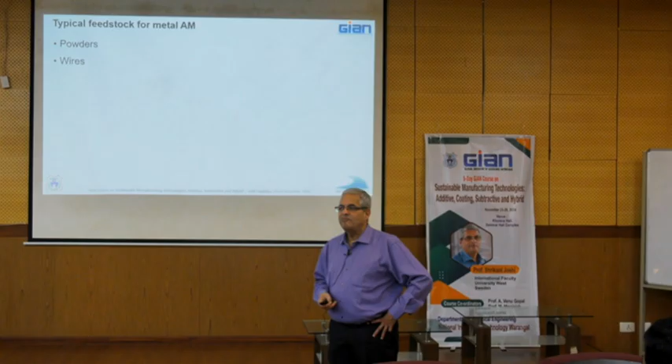Let's start, we already spoke about that. We'll talk a little bit about powders, a little bit about wire, more about powder than wire, because historically people have been using the same wires that they use for welding and cladding. There's nothing different there, although it could change, because AM is such a new field, right now people use what is available, even with standards.

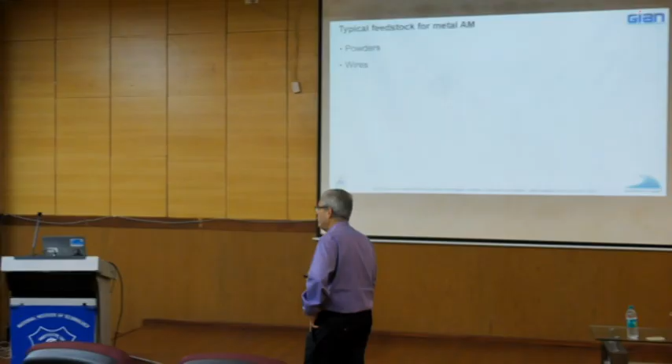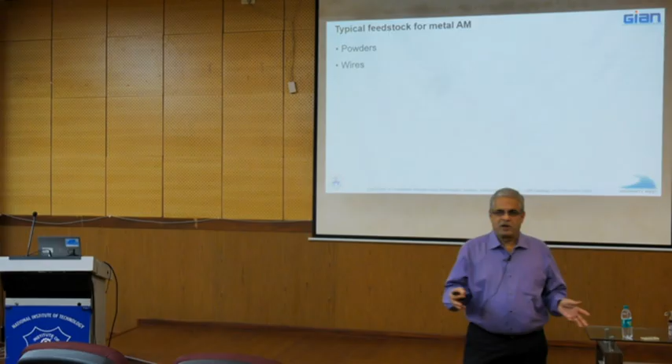And that's why I find the post-treatment part very interesting, because there have been standards available for materials that are traditionally manufactured for, let's say, heat treatment, and people use the same standards even now. They are specified as standards for AM, but we have shown, one of my earlier PhD students, that you need not use the same heat treatment, for example. What you can do for AM can be very different from what is traditionally done in case of cast or forged material, right? So that's important to know.

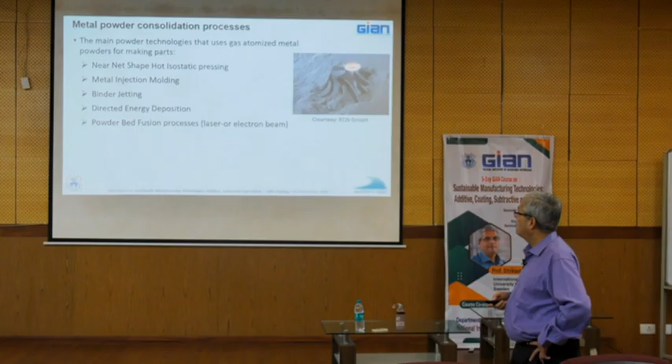Let's talk about powders in general and what are the main metal powder consolidation processes. I don't know how many of you have heard of near net shape by hot isostatic pressing. In one sense it's a very old technology, but very prevalent in the industry. Many of the powder metallurgy parts are made by hipping even now, or sometimes they use also cold isostatic pressing and that kind of stuff, or sintering.

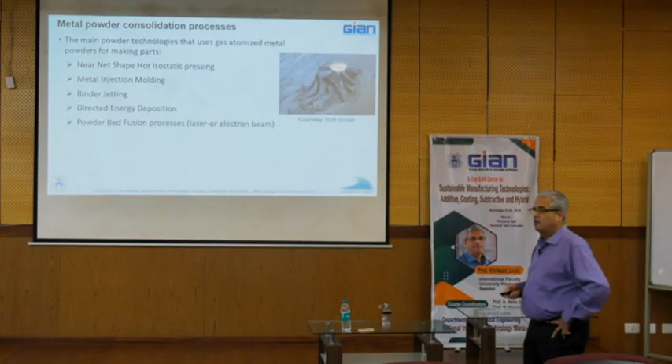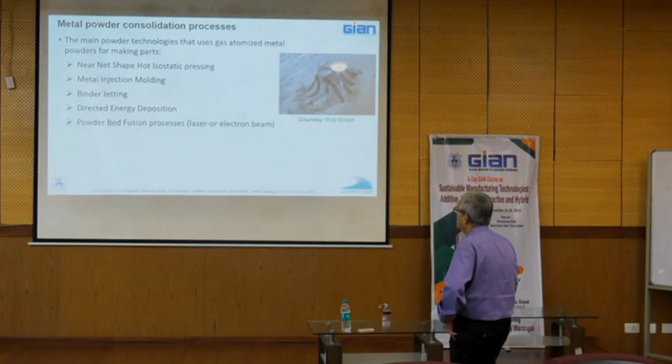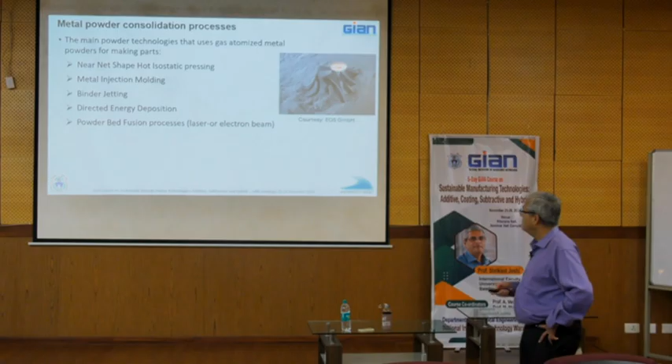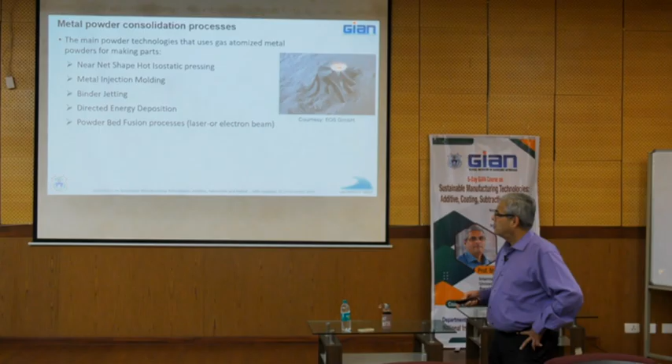But when it comes to near net shape, this is one of the main consolidation processes in vogue, but we will not talk about that because I don't believe that really qualifies as additive manufacturing, so we take that out. Similarly, metal injection molding is also very popular when it comes to consolidating powders, so this is just for information, it just does not fit in the rest of the things we talk about. Binder jetting, DED, PBF - we spoke about all of these, and today we will talk about powders in the context of at least these two, the directed energy deposition and powder bed fusion.

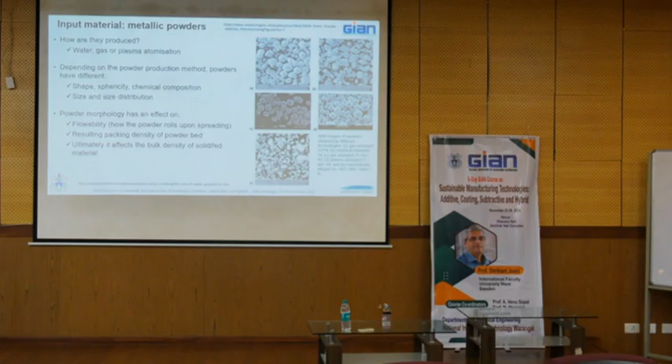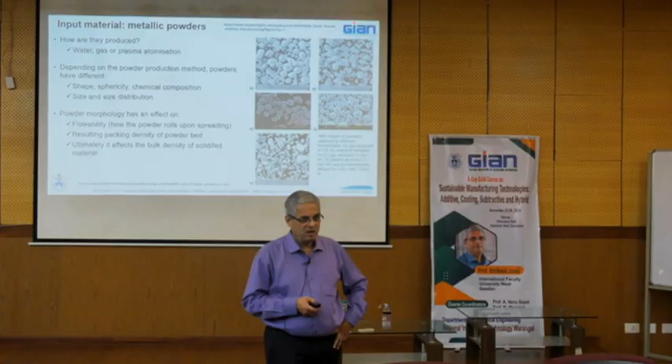So there are some things in our mind which are historical sometimes, but today we get really good powder feeders, right? We are able to feed powders as fine as 3 to 5 microns even, which earlier was not possible even with spherical powders. So today powder feeders are very good, but by and large what you are saying is right. Spherical powders are better, but you must also know it is not absolutely necessary. There is flowability in angular powders as well, which is not so bad.

But with powder bed, as we were briefly talking yesterday, at the moment everyone believes spherical powder is necessary. So we will assume that it is necessary, for the time being.

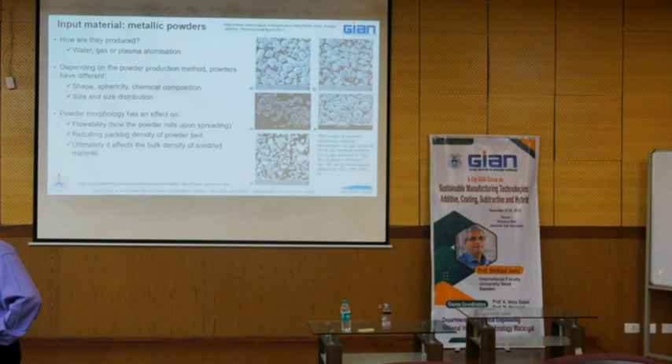Size and size distribution, is that important? Why is that important? Why is size distribution important? Not much important. Who doesn't agree with what this gentleman is saying - that size and size distribution is not important? You disagree? Why?

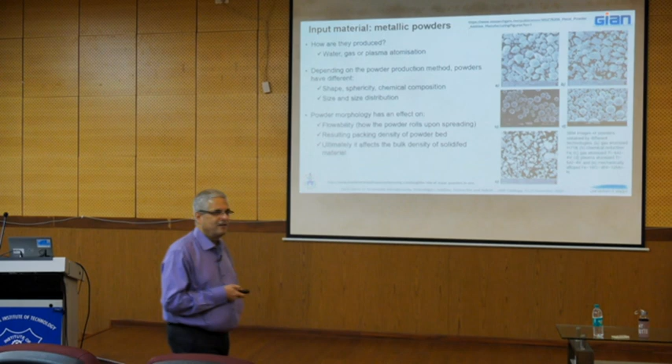I will say one more time - you are all engineers, please use the right terminology. If size is different, you get impurities. If you say impurities, I don't like that. So, you may not get complete melting sometime. That's what you mean, right? So that's okay, but you can't say impurities. Yeah, yeah.

Lack of fusion. Yeah, correct. Absolutely correct, that's the right answer, right? Having said that, particle size distribution is inevitable - it will be there, and I think that is what you were trying to tell. You cannot get mono sized powders.

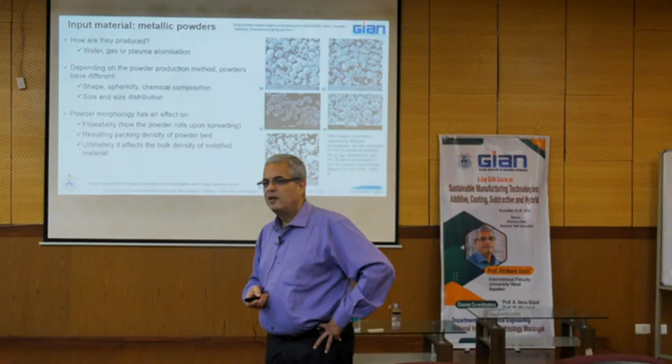Of course you can, but you have to give an arm and a leg to get that - it will be very expensive. If you say I want powders between 10 and 11 microns or something, it will be very expensive. So typically powders have a range. We spoke yesterday about 50 to 100 microns, 10 to 45 microns. So they have a range, and that is okay. You have to live with that for any process to be practically feasible.

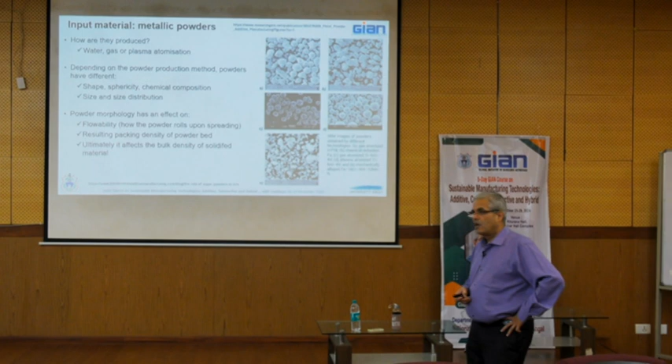And what you said also is correct - there is a lot of work done on how size distribution improves packing density. But that's a different story, we need not get into that right now. But I'm happy you said that - for a BTech second year student, that's impressive.

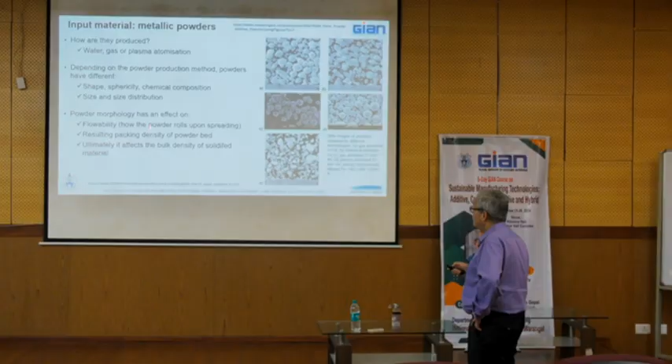Yeah, that's pretty good. Powder morphology - we are for the moment assuming that you need spherical for packing density, same point, right? And both of these eventually affect the bulk density of what you build.

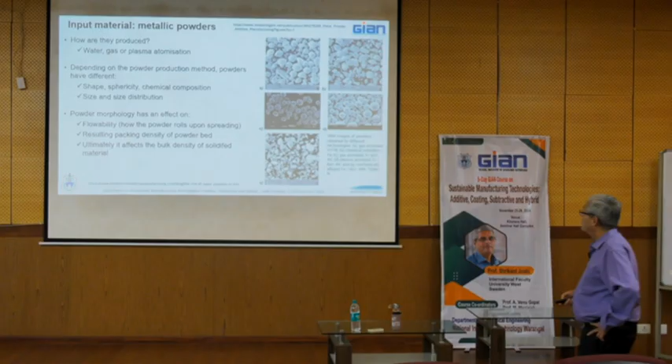You see all kinds of morphologies depending upon what manufacturing route you have adopted to make the powder. Once again, I'll go back to thermal spray - we use a lot of these kinds of powders as well, and it still works quite well.

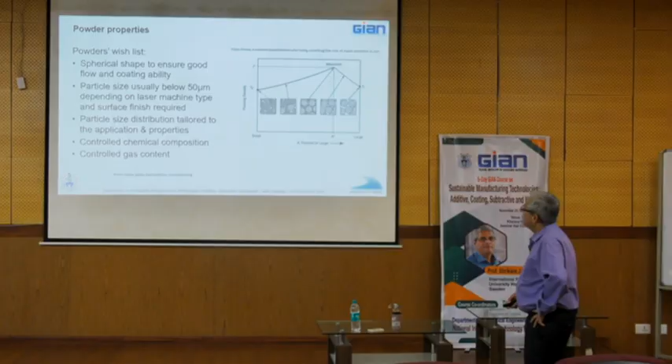But most of the AM crowd today uses these kinds of powders, because they're afraid - we are afraid that any other powder will not work. So if you want to write a wish list for the kind of powders you want to buy today, here are some of the points that I was looking at on one of these websites.

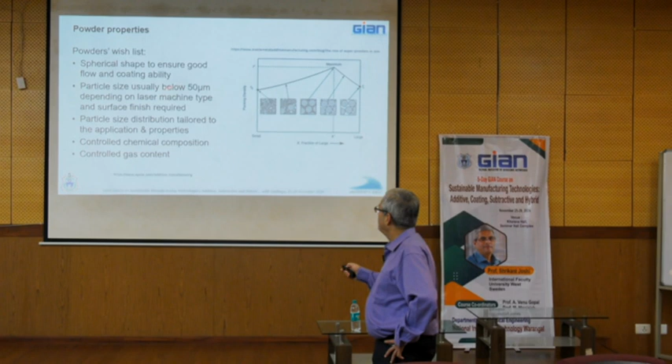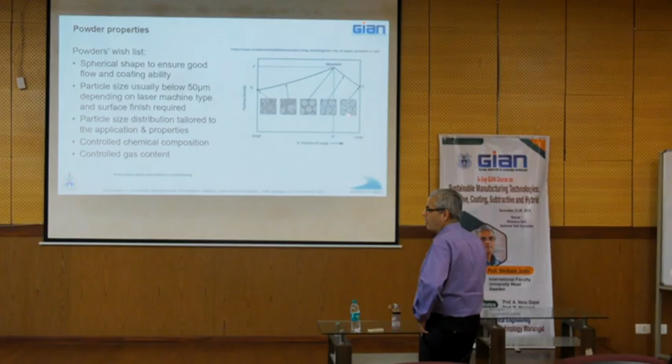You want spherical shape to ensure good flow. You want particle size - it depends upon what method you are using, but let's say below 50 microns. Particle size distribution should be tailored - if you're talking about packing density, that's not bad. If you have all of this size, you of course will not get such packing, but people say it should be tailored for the application. Nobody does that kind of tailoring, because it's just impractical.

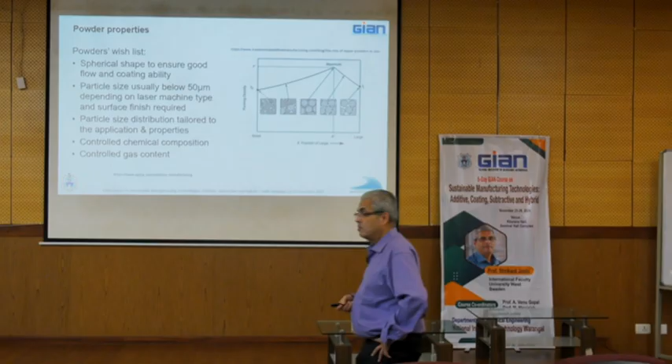Imagine I'm a powder supplier - I cannot begin to make different distributions in the powder for someone doing DED, someone doing powder bed fusion, someone who wants it for coating, someone who wants it for a powder metallurgy part. So the best thing they do is sieve and differentiate cut sizes, but beyond that, they don't do so much.

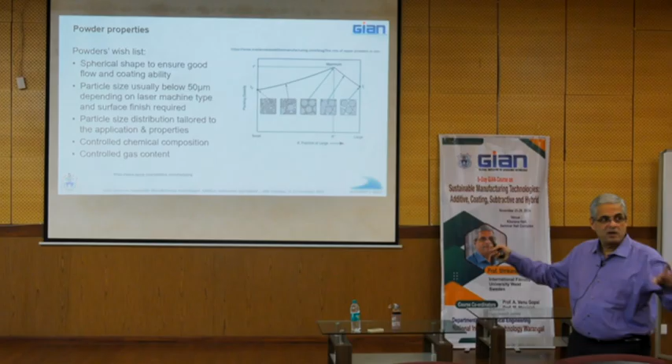If you open any powder manufacturer's catalog, you'll get many size distributions, many different cuts, like 5 to 15, 15 to 45, 45 to 90, more than 90, whatever. So depending upon what suits you best, there is a big choice to be made.

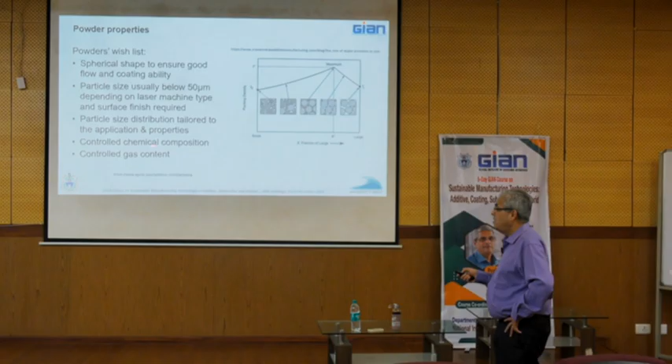Controlled chemical composition is where you must take care of impurities, whether or not they're there. Controlled chemical composition.

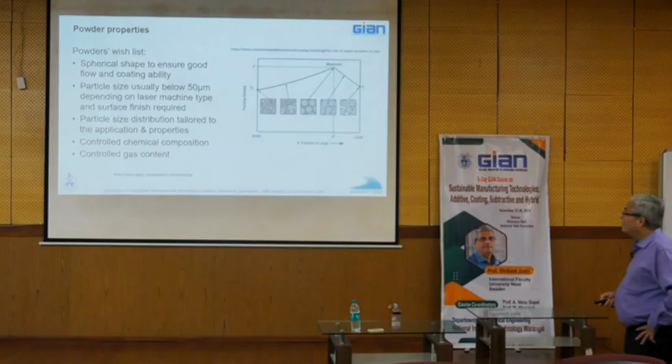There's one aspect we won't get into here, but in some cases people expect elemental loss during processing, and therefore they want to correct that in the feedstock. There are many examples of this. If you expect elemental loss during processing, you put a little bit more of that element in the feedstock, assuming some of it will get lost. So there are ways to tailor composition in that sense.

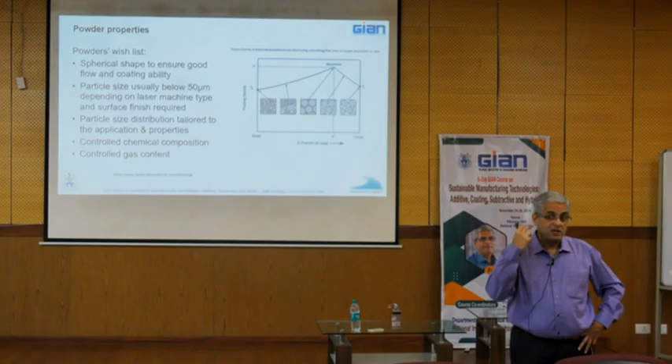Some of these powders, depending upon how they are made, also have some entrapped gas in them. What happens if there is entrapped gas in the powder? That leads eventually to porosity in your build. So all of these are important things to consider.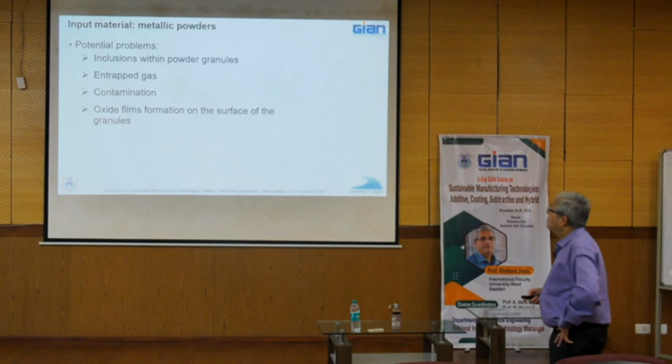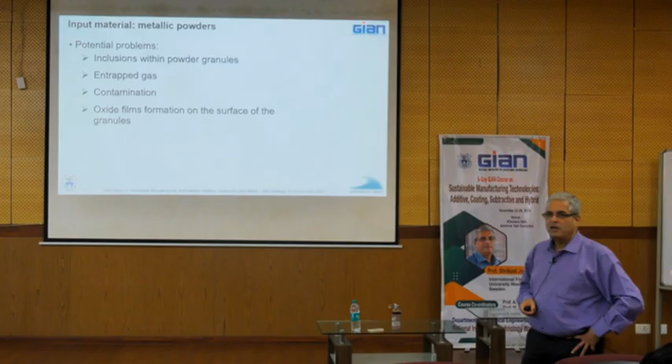Potential problems include inclusions within the powder granules, sometimes entrapped gas as we discussed. All of these you should know. You should always insist on a couple of things from the powder supplier: insist on a chemical analysis always, and insist on a size analysis as well. Those two things you must always insist on from whoever the source of your powder is.

We saw this yesterday, the range of materials that you can use in AM. This is an endless list, it can go on and on.

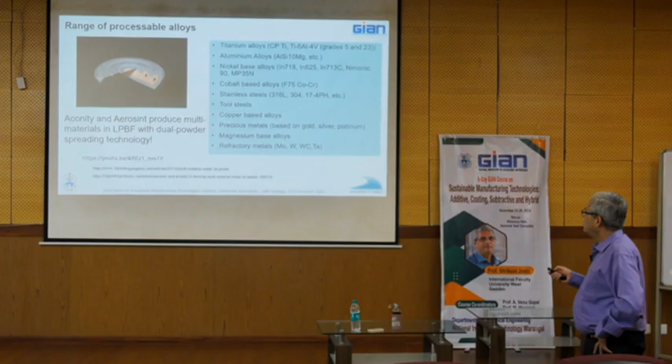While I was walking, I was talking to Dr. Manjay about what one of his PhD students does with DED, and that is multi-material. Once you talk about multi-material, the field is just wide open. You can do almost anything.

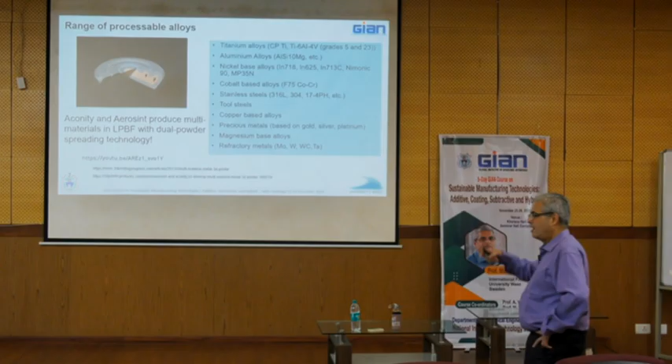I have a PhD student myself working on multi-material DED, and we are trying to do Inconel substrate graded to yttria stabilized zirconia. So we are doing a metal-ceramic functionally graded material. So you can do anything.

We have another project that we're discussing with GKN Aerospace, where they want us to build copper along with stainless steel, or copper ideally with a nickel based superalloy, and we are absolutely struggling. Why are we struggling? Take this example, copper with nickel based superalloy. Why are we struggling, do you think?

Thermal conductivity, I don't think we're struggling so much with that. Yeah, mostly that. We are struggling because the laser that we've been using for depositing nickel based superalloys suddenly is inadequate when it comes to copper. So we're not okay with that laser for copper. So we are shopping for a green or a blue laser at this point.

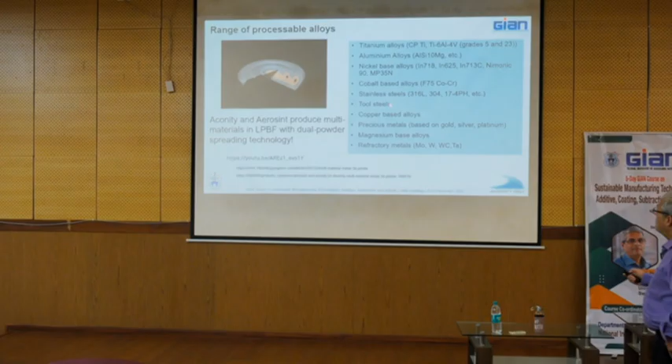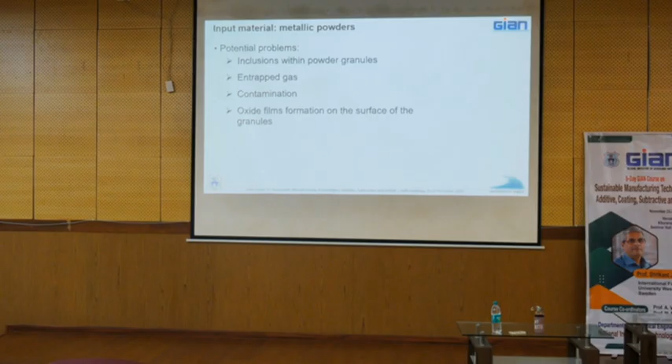Anyway, that was an aside, but important for you to know - there are so many things you can do. For each of these you will need powder, and you need to find suitable sources for that. I suspect how important all these issues are will sometimes depend upon which material you are talking about.

For example, titanium will have a completely different set of challenges compared to, let's say, something like stainless steel. This will be much more forgiving. It doesn't matter if something happens slightly with composition, but with titanium, nickel based superalloys, your threshold is pretty stiff.

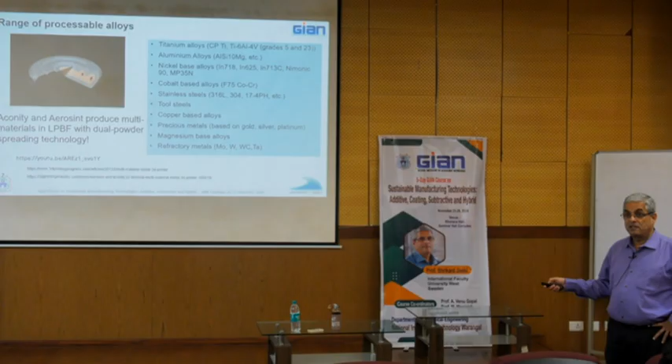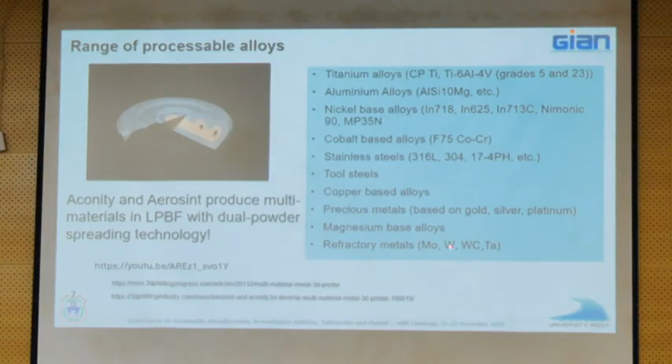Some materials like this are also extremely difficult to deal with, but here you may want to revisit the size - you cannot always use the same particle size. These are very high melting, extremely high melting materials, so you can't use the same particle size in a given process as you would use for maybe copper or stainless steel. You should be aware of that.

Powder manufacturing methods. Do you get spherical powders by ball mill anytime in your life? No, right?

But if you want to mechanically alloy powders, then ball milling is a good idea, but not for spherical powders. Now, if we assume that spherical powders is our target, most often people use atomization techniques.

What is atomization, do you think? Simplest definition of atomization, anyone?

Disintegration - breaking down of a material to the smallest possible size, smallest possible particles.

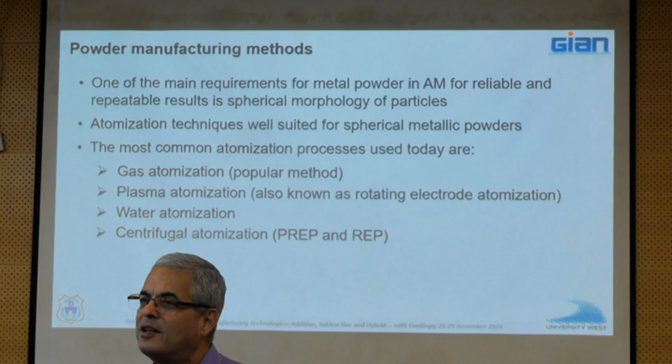So you're making life very complicated - you are relating atomization to atoms. Yeah, that's not the case. Particle into simplest form, a single particle. You're relating that to atoms - no, it's not that complicated.

So usually... is the problem with the projector or that cable? You think?

In your research or whatever you are presently doing? No, you use powders. Okay, what kind of powders do you use?

So when you get a powder, what do you characterize it for? Because that's something we are going to talk about here. What are the important characteristics of the powder?

What do you do with the powders once you receive them from a supplier? Sir, we do SEM to check the shape, size. You will do SEM, okay, for shape and size.

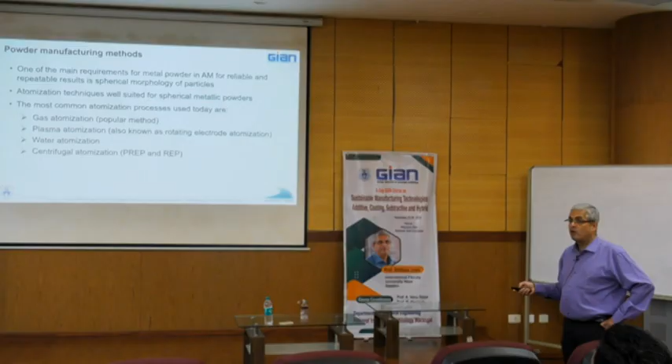Techniques are the most popular to make spherical powders. If you don't want spherical, there are other ways, but I've stayed out of that. Out of all these, gas atomization is the most popular, especially for powders used today for additive manufacturing, and it involves three major steps: one is melting, the second is atomization, and the third is, once you get a product, you want to size it - get rid of the fines, get rid of the coarse powders. So these are the three main steps.

You need to find a way to melt your feedstock, and you could do it in different ways. You could have the charge initially in the form of an ingot. If you are making complicated powders, you can put different powders together, make an ingot, then melt and atomize. And so you essentially atomize - in this case, atomization means fragmentation. You fragment a molten droplet, not take it to a level where you can't divide it anymore - that's too far.

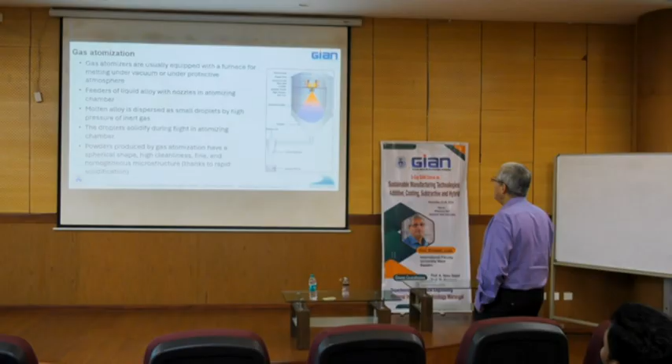Atomization is fragmentation - the molten stream is fragmented, and then you cool it very quickly, so these droplets solidify really fast and you get spherical powders. Each droplet converts into a spherical particle. That is broadly the idea in all atomization techniques. The changes may really happen in how you are melting it. In this particular case, this is equipped with a furnace, so the melting happens under vacuum, so there is no oxygen pickup, etc.

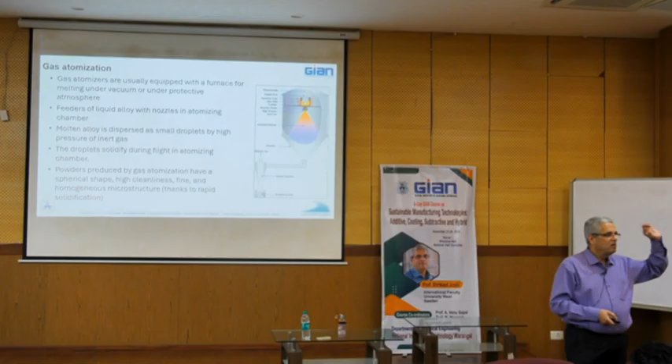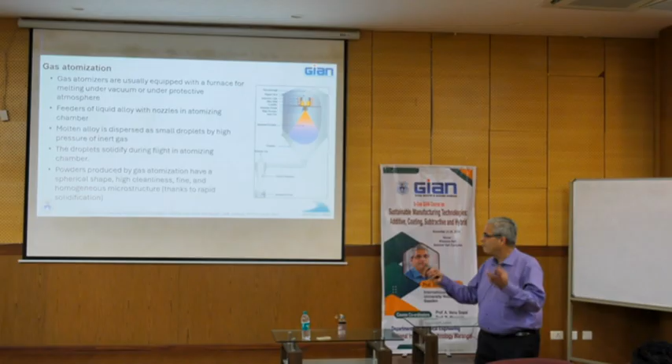These atomized droplets formed because of a high pressure gas used for atomization then solidify in flight to get your individual powder particles. As you can imagine, these would have a very varied size distribution. Then there is of course a collection chamber - these are collected and sometimes separated using a cyclone to some extent, and then finally sieved, so that you get the kind of size cut that you require.

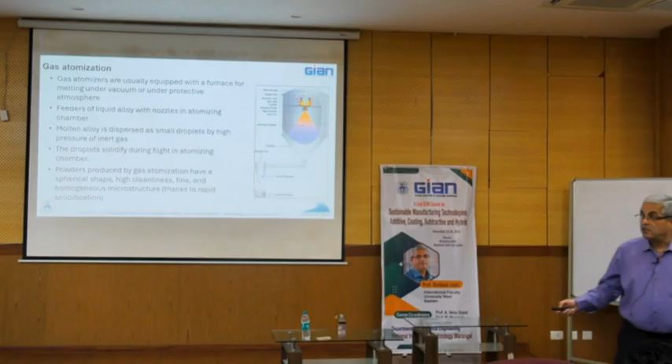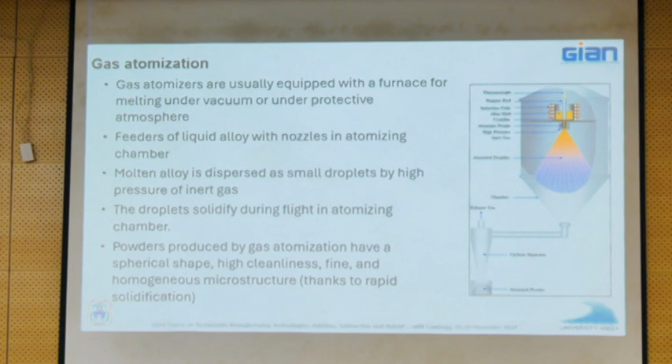The reason people prefer gas atomization is that it's a very clean process - you do it in vacuum, essentially melting a charge and resolidifying the atomized molten stream. So there is not much opportunity for any contaminants to come in, and cleanliness is a big thing.

Even homogeneity from a chemistry standpoint is assured, because you're just melting that stream and solidifying it. So there is no in situ reaction involved or any such thing. You get a very homogeneous microstructure as well because of the rapid solidification.

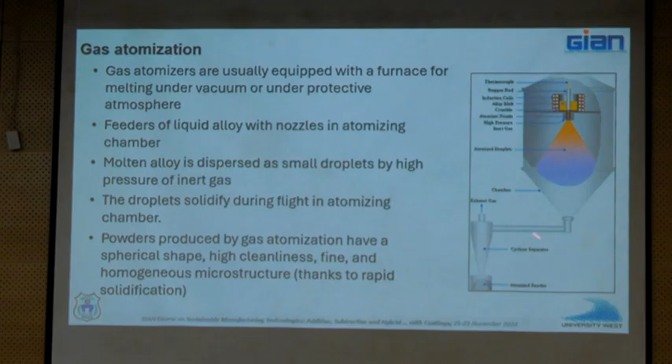There are some different variants of this gas atomization, but most of the differences essentially come there - how do you melt this? All the difference happens there. Just like with thermal spray, the fundamental of how coatings form is the same; what kind of heat source you use is different. Somewhat similar here - all the differences kind of reside there, but otherwise you do get atomized droplets which rapidly solidify, cool to form powders.

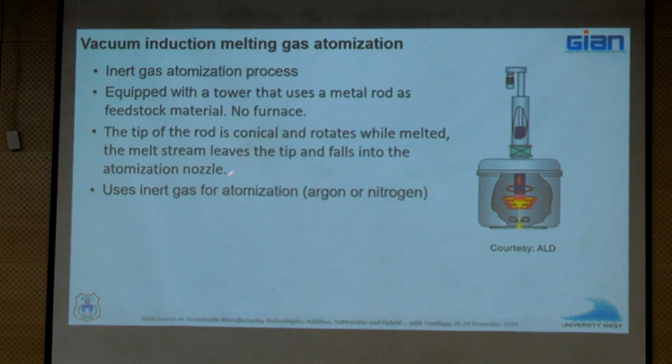Here in vacuum induction melting gas atomization, as the name suggests, this is equipped with vacuum at the top, and this vacuum during melting ensures that it is clean. There is inert gas that is used for quenching the molten stream. So you have different variants of that. I don't want to get too much into detail, but all of them essentially try to do the same: melt the feedstock - an ingot or whatever of the same chemistry as the powder that you need - and then use an inert environment to collect the powder that you desire.

You can also do water atomization instead of gas - use water jets to quench. This also works very well so long as water doesn't react. So when the materials that you are producing are non-reactive, water is frequently used; it is much cooler and gives higher cooling rates as well.

How do you take a powder specimen under an SEM? Can you please tell? A little bit louder so that they can hear you.

Take a sample of the powder from the raw material, place it as a piece of paper and observe it under the microscope. We have to find out whether it is metallic or non-metallic, and then we have to place it on the carbon tape. After that we have to do the coating.

You said you take it on a piece of paper and see it under the SEM - really, you do that? No, sir. So in a tube, we have to first store it, sir, in a small tube, whether metallic or non-metallic.

Louder - I like his answer because that's how we do it. We have to take the powder and first identify whether it is metallic or non-metallic. If it is non-metallic, we have to go for coating - normal sputtering coating, whether gold or platinum, we can use that. Or if it is directly metallic, we can place it directly on the carbon tape. After that, we have to use dry air to fully disperse the particles throughout the carbon tape. After that, we have to place it on the SEM machine based on what electron voltage we are going to use, whether 15 kV, 10 kV, or 20 kV. Based on that, we perform the analysis.

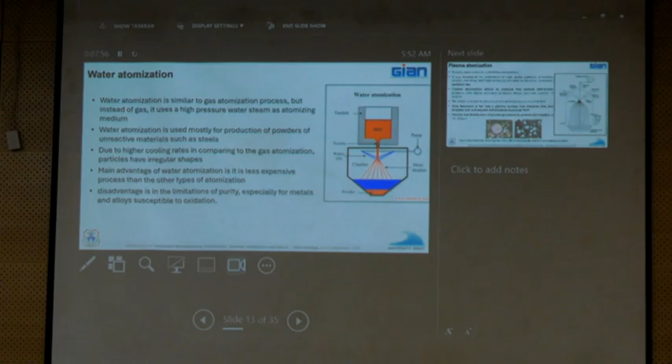Very good, excellent, nice. So all of you are now experts in SEM characterization of powders for AM. But good answer - we should talk during tea break. I'm scared if you take it on a piece of paper. I'm very scared - I'm scared for your SEM more than anything else.

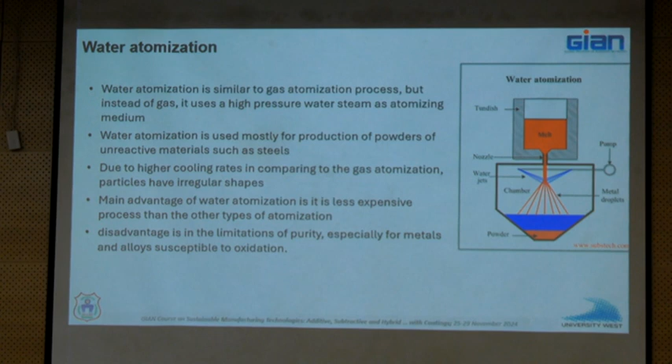So I think we are losing a little bit of time here. Long story short, all of these methods do almost the same thing.

Two things can vary: how are you melting the material, and how are you cooling the material? Those are the two things that vary, mostly.

You will also come across something called PREP powders. How many of you have heard of PREP? Yeah, plasma rotating electrode process - that's another way of producing these powders.

Let's talk about this. So you have melted the powder, you have rapidly solidified it, you have the powder collected now, which has a very wide size range.

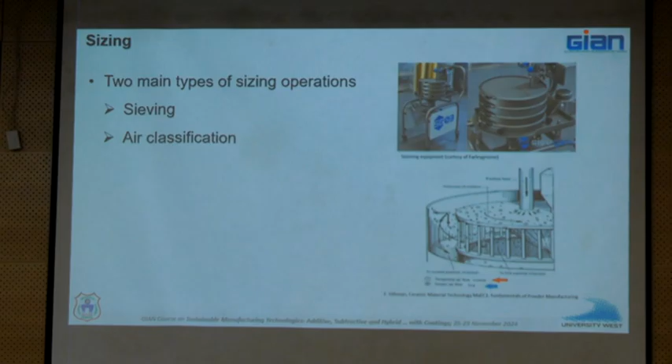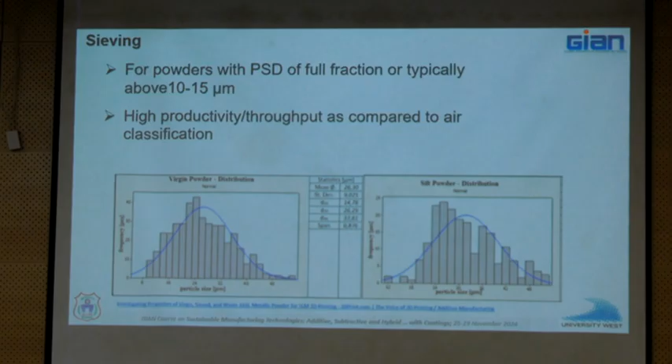Some people also use air classification. For sieving, you normally use it for particles coarser than 10-15 microns, and it has much higher productivity and throughput compared to air classification. Since you're essentially like a chalni type, using the same thing, you can very easily get the size ranges that you desire.

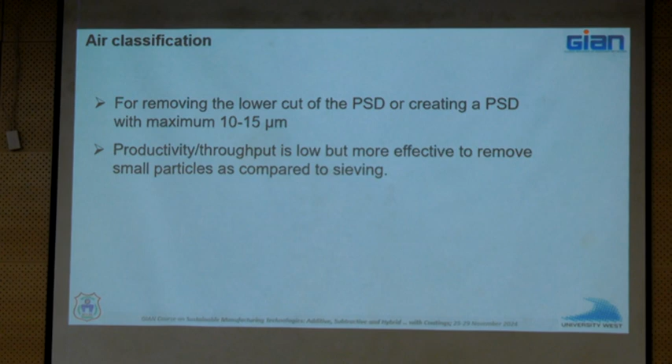With air classification, 10 to 15 microns is usually the upper size limit rather than the lower size limit, correct?

I was trying to get here already with the particle size distribution. There are many ways to do particle size distribution.

We will not get into that analysis here, but it's important that for each process that you are targeting and for each material, you should be aware of what particle size distribution is suitable, so that you don't get, as someone mentioned, partial melting and therefore heterogeneity in your build.

I will put a big star against this: all equipment manufacturers will give recommendations for particle size distributions that are applicable. They will also give recommendations for who you should buy the powder from.

But it is eventually left to our judgment what to do, where to buy these from.

Characteristics, we touched upon this a little bit. What are the important characteristics? The one I heard most times is flowability, and that is true. I think one of the key characteristics is flowability, which is governed by shape, etc.

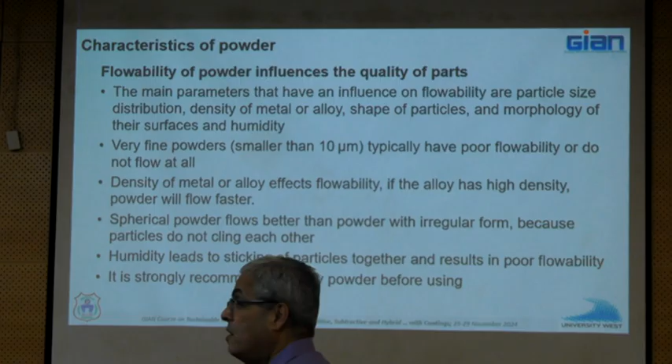But what should you be aware of? You should be aware of segregation. If you are feeding both of them and they are not milled in that sense, but they are just put together, you can get segregation because of differential flowability of each, due to density differences. So that's something you must be careful about.

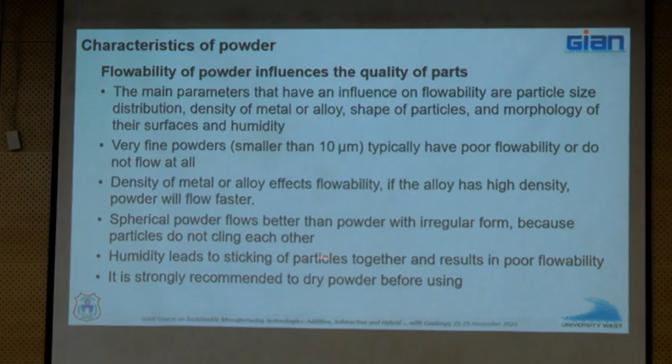In some cases - I don't know, maybe Warangal is a good place, not much humidity in the environment, I hope - but otherwise, there is often a recommendation that you dry the powder before using, if you expect that there could be humidity and that can affect flowability or at least lead to unreliable uniform flow. So we do this a lot in Sweden sometimes, just dry the powder before we use.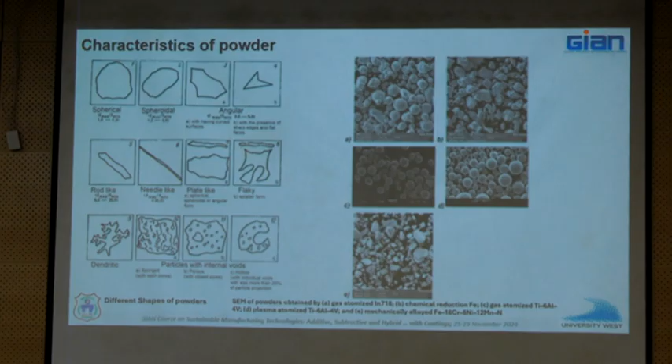Don't want to talk about this so much, but I hope this is my last slide. I'm tired of feedstock, I don't like it so much.

I think you will see it in your notes, but desirable powder qualities are spherical, no satellites. I strictly don't believe in this - it's okay with satellites, if you know how to deal with them you can still get very good builds. But this is what today's specification is.

No satellites, no internal porosity, that's correct. Yeah, few surface pores, because all of these kinds of things lead to incorporation of pores or defects in your build, right? Narrow size distribution also gives good porosity, right? So I've just put down here how you will characterize these powders.

We spoke a little bit about morphology, SEM, etc., and porosity. There are different ways to do that. You can, like this gentleman said, collect it on carbon tape to look at morphology. You can also mount the powder and look at the cross section, with particle polishing, then look at it under the SEM to see if there are pores, etc.

There are measures for flowability, very simple devices, like a Hall flow meter, where you typically look at how much time it takes for 50 grams of powder to flow, or something like that. So there are measures of that, and a little bit on handling.

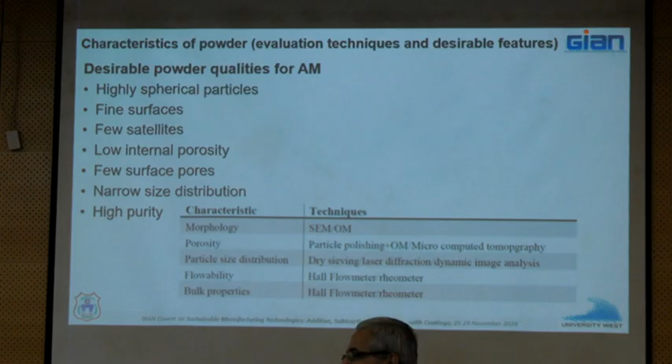Surface pores are desirable? Desirable is few or no surface pores. Yes, sorry if it was interpreted the other way. I'm not saying few surface pores are desirable. Desirable is that there should be few or no surface pores. Correct, good point.

A little bit about handling. I won't go through all of this, but you should take the normal precautions one takes in handling powders, especially when dealing with finer powders. Some of these powders can be airborne, and if there is a possibility, it's not so much of a problem in PBF, because most of it is done in an enclosed chamber. But when you are dealing with DED etc., you should be careful, especially if there are possibilities of fuming, and therefore getting some sort of nanoscale material formation.

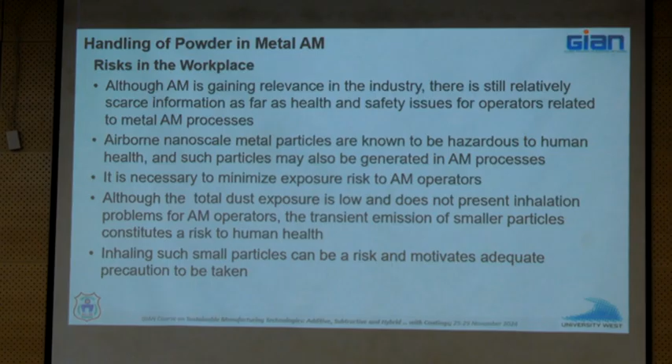That's something you should be very careful about. It's good to wear masks, but otherwise these are very normal procedures that one adopts in dealing with powders. It's good to know that all of those precautions apply, as you can imagine.

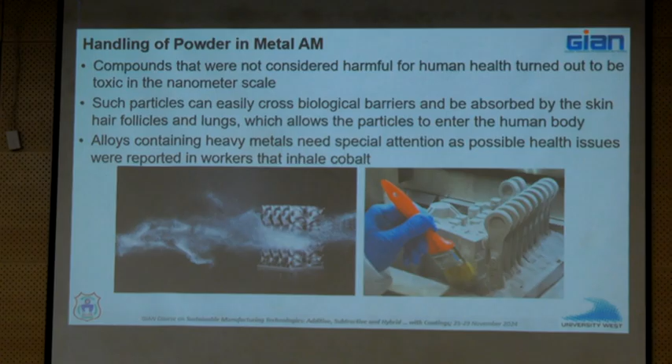There are various steps during the AM process where you just don't want to stand there and do that kind of stuff. You have to do it in an enclosed environment, with proper protective masks, in a well ventilated environment, and stuff like that.

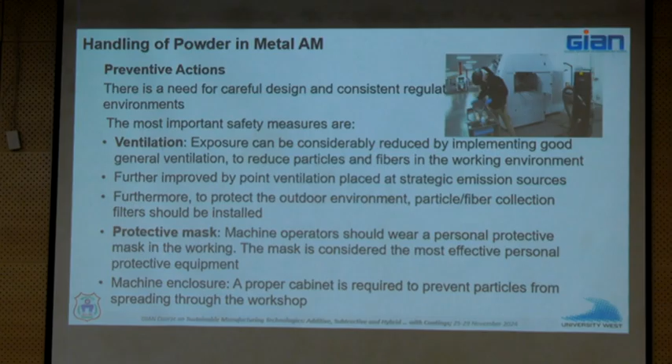A little bit about reuse. We spoke about that very briefly yesterday. Not so much from a safety and health point of view, but from an ecological standpoint, it's always good to try and be very aware of the potential for reuse of these powders for various reasons, because these are all very expensive feedstock. You don't want to use it once and throw it away. You can use it several times, and depending upon application, they are capable of being used many, many times.

It of course has slightly higher oxygen content in the powder, but that is a little bit application specific. If this was stainless steel, I would reuse it several times, doesn't matter, because the applications of stainless steel are also a little bit more forgiving. So you must relate potential for reuse and how many times to your application, because oxygen content will progressively increase. That is known, so you must relate this to your application in a good way.

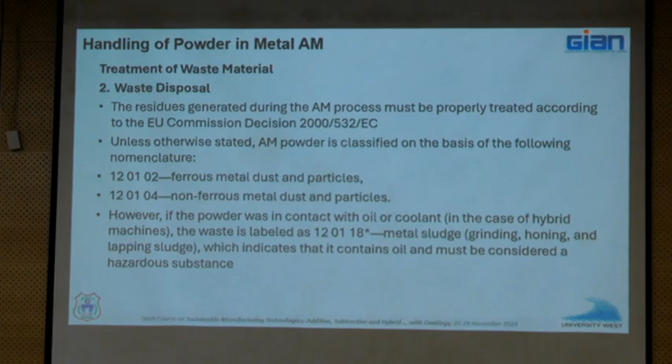Let's talk a little bit about wires and then get on to something more interesting. Powder versus wire - I didn't go into much detail yesterday, but wires are often a more economical choice.

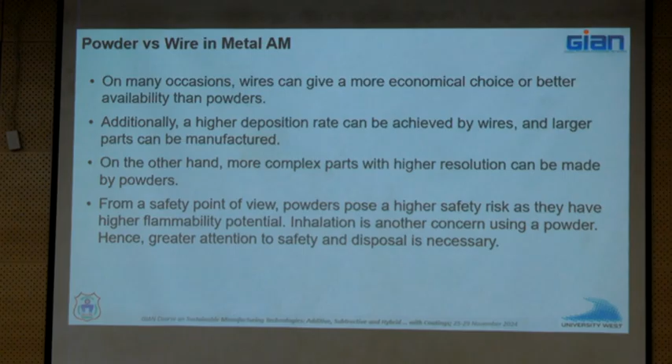We've seen that all the biggest AM structures that have come out of our work have been in case of wire DED rather than powder. So wires can give much more economical output in that sense. It also gives a higher deposition rate compared to most other methods. One handicap, however, is with a wire you can't make parts that are as complex as one can make with a powder. That's one of the handicaps. Also, we just spoke about safety - most of these issues don't apply when you're using wires, but wires are much safer to handle.

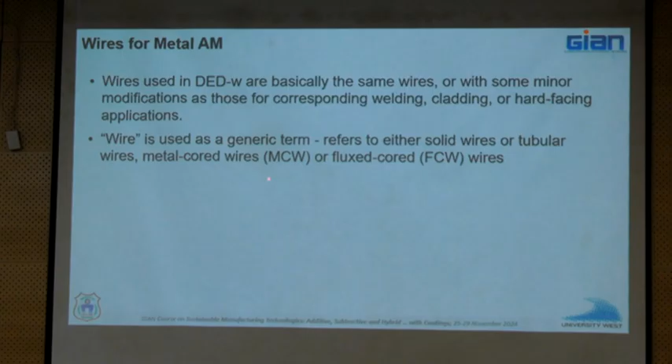Today, and things can change tomorrow, but today the wires that we use in DED are the same as what wires we have been using for welding - there's not much difference. And when I say wire, I'm using it kind of generically. Today people use solid wires, hollow wires, metal core wires, flux core wires - all of these can be used just as they are being used in welding.

Drawing or rolling, like we spoke about atomization, are the most common methods of making these wires. They are usually cold drawn. In some cases you need an annealing step - not always, but sometimes after cold drawing you may need some annealing so that you restore the ductility. That's true in case of titanium, for example. People resort to warm drawing as well. And when you're talking about cored wires, there are different ways to prepare that, but the guys in AM need not worry so much about that. It's available, you use it, and there are many people who know how to make these wires.

No problem. Again, today I emphasize that all the time - at least at the moment, the AWS and ISO codes apply for all these wires that you would want to use in AM. Yes, please - you're saying the wire spool has got contaminated.

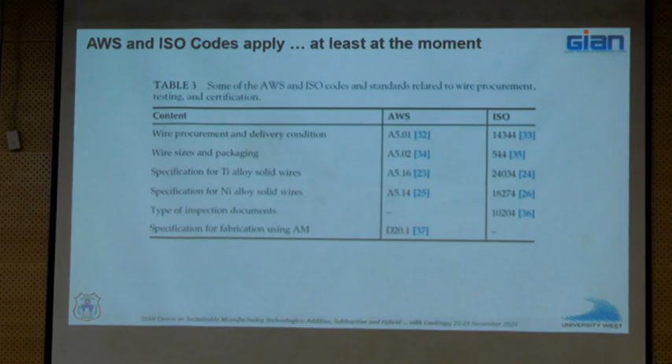I don't know, I mean you should not let it, but you raise a good point. I don't know where it is, but maybe I ran out of space. That's exactly the point I wanted to make on this slide - that especially in AM, storage of these spools will slowly become critical. Right now people don't worry about it for welding, but it will change for AM for sure. I don't think you can revive that spool in some way - you must use it for applications that will accept the kind of damage that has happened. I think that is the best thing I can tell you, but otherwise you can't do so much. And even if you're able to do something, it will be much more expensive than buying a new spool - I guarantee you that. So it's not a good or simple way to take care of it.

So, as I said, at the moment we are using wires that people use for welding. As you know, in welding and cladding, dilution is a big issue, so people correct for that kind of stuff - they compensate for this kind of dilution in the wire composition. You may not need that in case of AM, because when you are building large structures, the dilution is limited to the first few layers. After that there is no dilution. So you may not need the kind of correction that you incorporate in these wires in case of welding and cladding. So that's important.

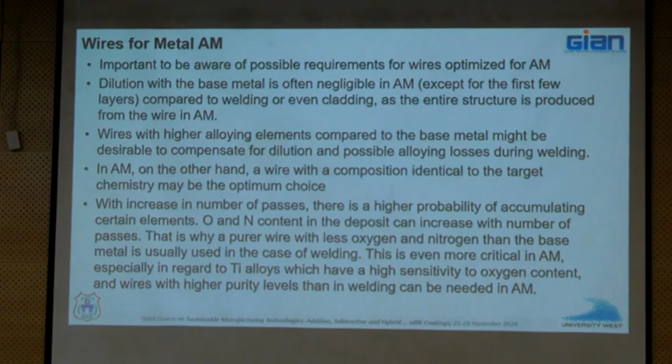The other thing to remember is there is a probability of accumulating elements like oxygen and nitrogen with increasing number of passes. This will be even more critical in case of AM, because when you build larger parts, you can get more and more accumulation of oxygen and nitrogen. So I think even purity, when it comes to high performance materials like titanium alloys, is something you will need to pay attention to. But at the moment, standards, regulations, and even suppliers of traditional welding and cladding wires are being looked at by the AM community as well, and there is of course a very large portfolio of such wires that is available.

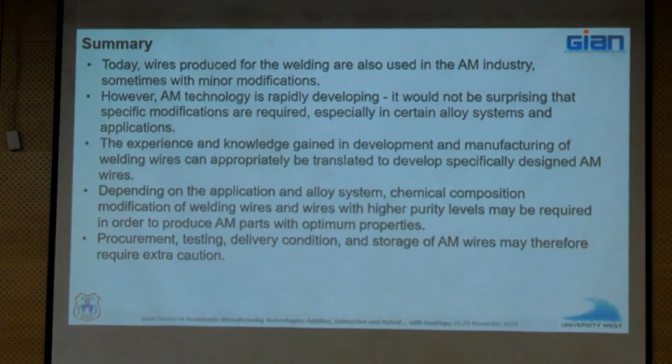Just a summary of what I said: wires produced for welding are also used in AM, and this is a caution, but that may change tomorrow. As AM technology evolves, you will perhaps have some specific modifications that become necessary in a few alloy systems like titanium and nickel-based superalloys. And exactly the point that you made - storage of AM wires will require extra caution, that's exactly what I meant. When you look at much larger structures, I think any impurity uptake, or even things like oxygen and nitrogen which we tend to not attach much importance to, could become very critical in case of AM builds. So nobody talks about it today, but I think this could become important at some point.

I want to stop here on this one, move on to post treatment - but is it time for a break, or can I start?